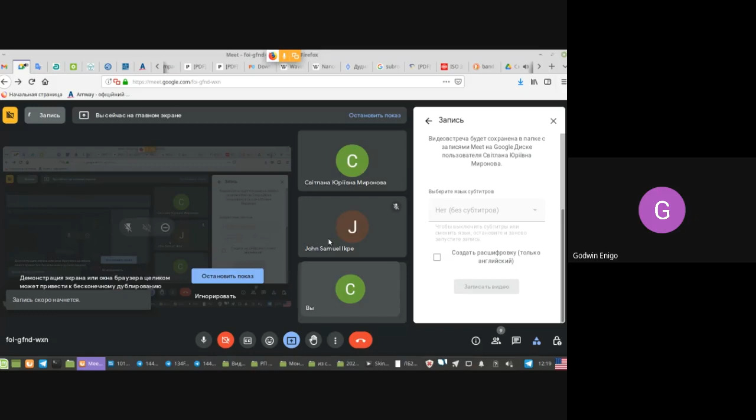This one. Yes, ma'am.

Once again, laboratory work. Laboratory work that we were doing previous time, last 2 weeks, and you are going to finish it now. Actually, there are two different laboratory works, and seemingly one report, but you have it in 4 pages.

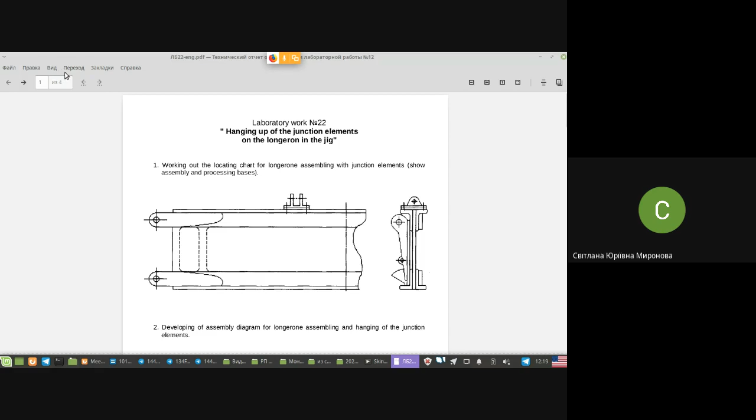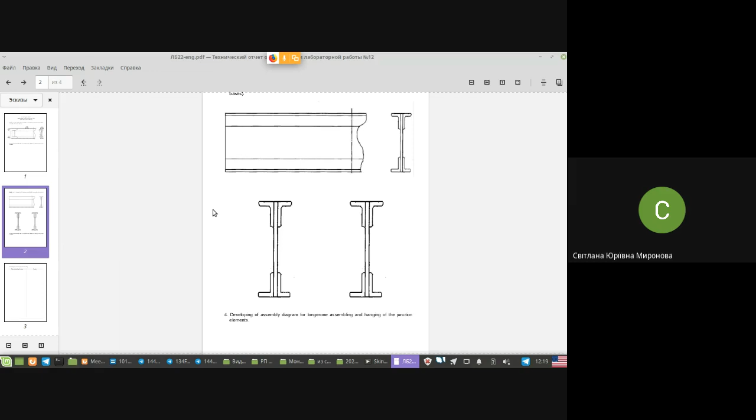You have 4 pages in this report. One page with a picture and empty place for a diagram of assembling. On the back side, also a diagram of locating chart and empty place for diagram of assembling. And you have 2 pages each with technological process.

What is the difference? Actually, the item to be assembled. Laboratory work today, finally, we suppose it to understand the jig arrangement and the process of manufacturing this final shape of this spar.

That is the spar of the center wing. What is center wing? I hope you remember. There is the compartment of wing, which is between the left wing and right wing. It may be built into the center of the fuselage, under the fuselage, or over the fuselage, whatsoever. It's the central compartment of the wing.

This central compartment of wing typically has the same structure as the wing. It has a front spar, a rear spar, and ribs between them. Whatever spar this is, front or rear, above all, you should imagine the airplane, and you must recollect that.

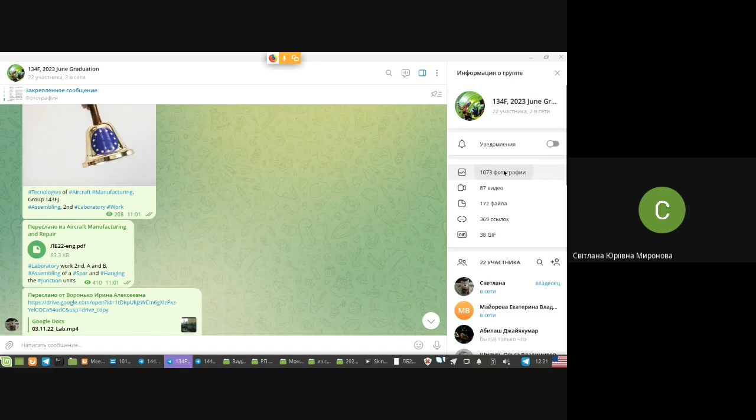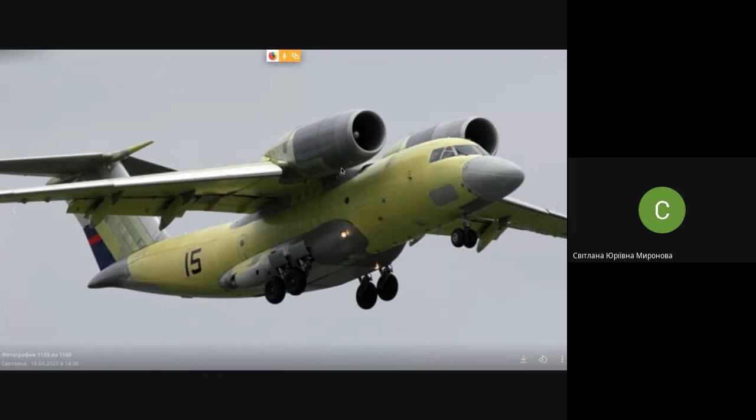It's your group. Some days ago I dropped you here a photo of Antonov 72. Look, what is this? Where is the center wing? Center wing is in the middle, between left and right wing. As you might see, practically at the center wing, the engine nacelles are joined. Maybe that's not better visible here. No, this photo is more talkative. By the way, why it looks so weird, and why I dropped it to you.

In order that you might see it unpainted. I hope you remember that before an airplane is confirmed, before the customer agrees to take it, the airplane is usually not painted into the so-called suit of the company that's going to buy it. In Russian or Ukrainian we call it livreya, like the suit of a servant, and in English it's called a livery — the coating which corresponds to the colors of the company. Here it's an unpainted airplane, you see.

Where the center wing is, I already said. And this center wing is symmetrical usually. You see the airplane, and you understand that it's mostly symmetrical.

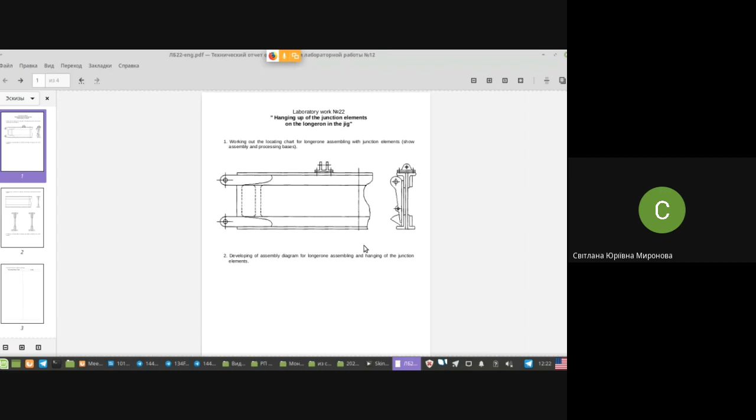So what you see here in the picture is a half of a spar, in laboratory work, in laboratory class, and in the video explanation that you were supposed to watch before class — remind you, before class, even 2 weeks ago. It's a symmetrical picture, and that is why you see only the half. On the left, on the right, it's completely the same.

So when you are explaining something in the diagram of assembling here, you're supposed to remember that you have two halves, and maybe you need to use names like left one, right one. Here you also have top and bottom. You need to remember that you are working with top, bottom, left, right.

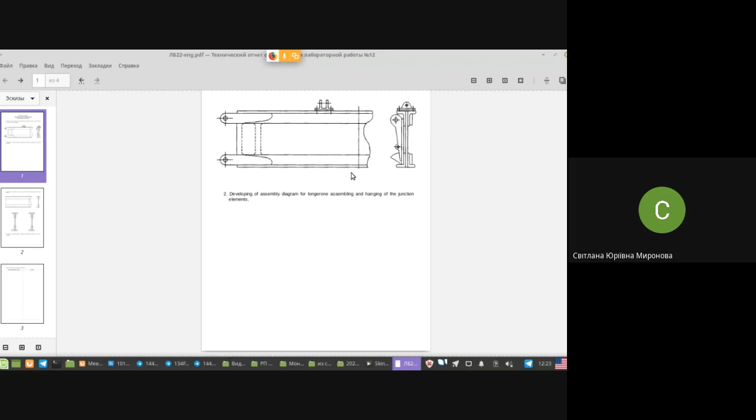Pay attention to the next fact — what you need to do. You need today to compose a technological process of hanging the element of junction units, so-called elements of junctions. What are elements of junctions in your case? There are big brackets on the back side.

Here you see, approximately you see. You will see it in a photo and you have seen it in the video. In case you watched this video, lazy bones — I'm already tired of swearing at you, Mom, I swear — you watched the video, oh, you pleased me. It's just a balm on the wounds of my heart, really. You can't even imagine. If even you do not understand what is it there, I'm happy to hear that at least someone followed the task.

Look, big bracket. You have little brackets in front immediately that we usually call knives because they are shaped that way, we call them knives. And also you have engine mount brackets — these little side brackets.

All these brackets must be located onto the spar, must be assembled all together with the spar only in a jig. That's why we were talking about this in the topic of junctions at the beginning of the semester. The axes of these brackets, the axes of holes in these brackets, determine the position of other aggregates with respect to each other, because if you place a bracket wrong, these side brackets for engines — what may happen? Engines will have different heights or different orientation of the engine axis, or they will be unjoinable at all to this wing. And it means your airplane lost flight performance.

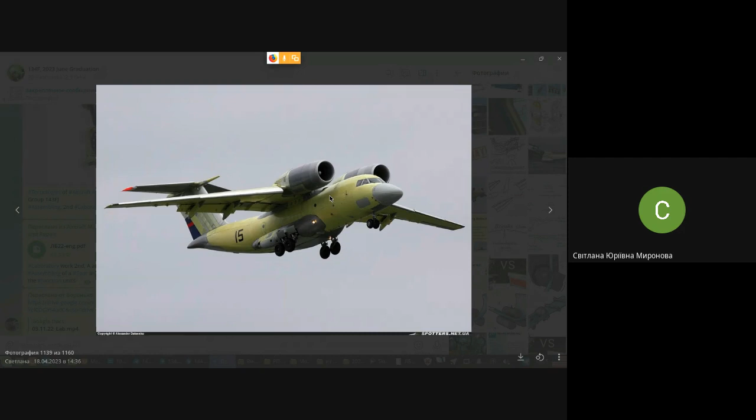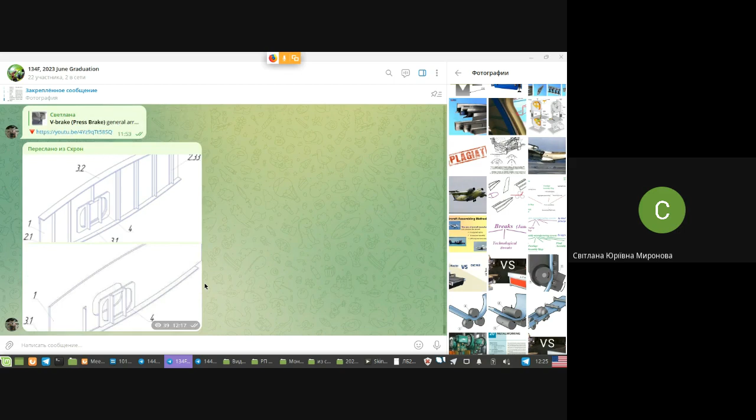In case these side brackets that you might see — I forgot, where should I show something? Well, in the laboratory class report. Ah, here it is.

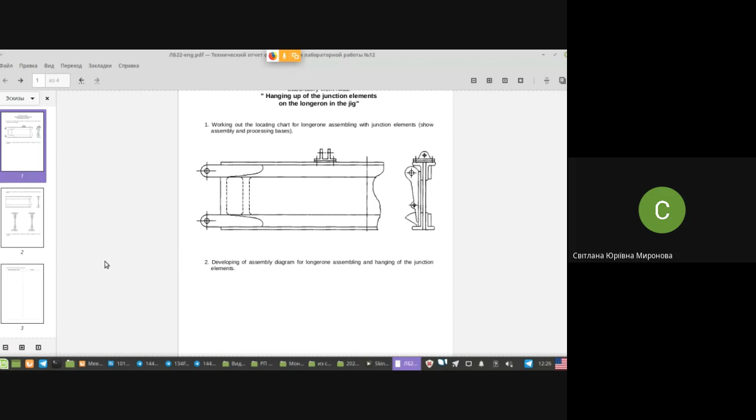This spar, which consists in turn of web, caps, and stiffeners, you may assemble preliminary and not compulsory in a jig. It was up to you, what you decide.

Whatever you decide next, you reflect here in the diagram. It's called assembly diagram - the diagram of order of assembling.

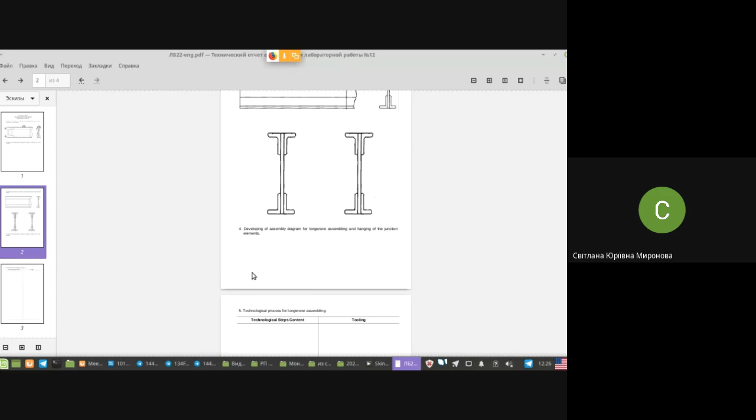Here today you suppose to compose the final diagram of assembling, which includes the previous one as a sub-diagram.

I hope you remember that the diagram has so-called parallel sequential assembling. In order to understand what you are starting with, what is the diagram, what is the first part here, and what are the names of the parts, you need to watch the video.

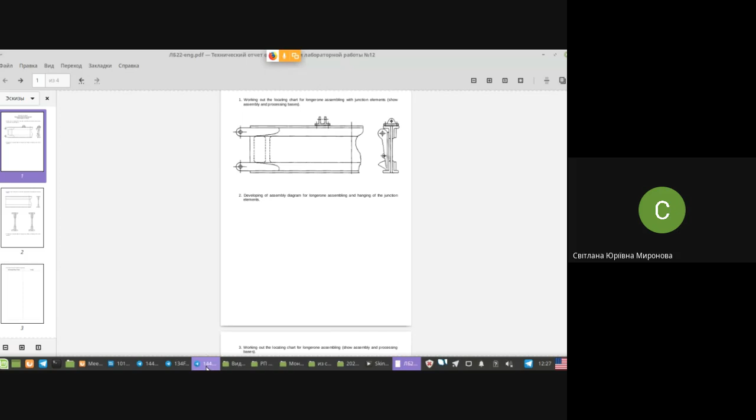I also said that I'm going to show you the materials that you have seen in a video. The materials were used with the previous group in order to help you - here are drawn the names, and these names you are recommended to use. You may use it, or if you'd like to use something else, you may use something else.

What is assembling by assembly holes? I hope you also remember - it's in the picture a little bit higher. It's aligning of preliminary made holes in some parts, and due to this, localization - finding, searching position of parts with respect to each other.

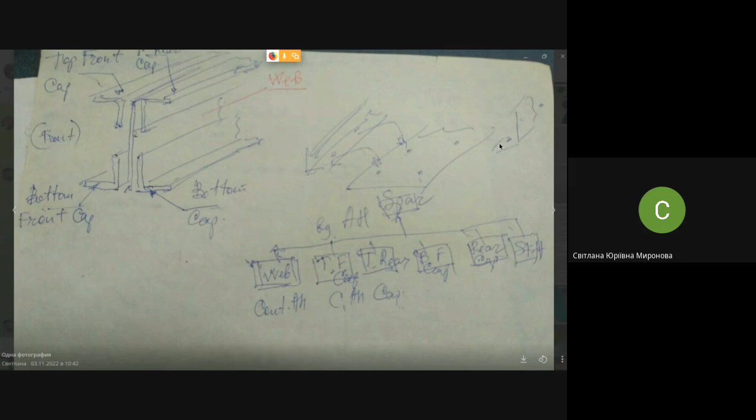In this case, a web has, as it shows, a system of assembly holes for top cap, for bottom cap, and so on. If you'd like, it's not compulsory to do it like this - if you'd like, you may assemble the same. There is the same picture, but by pieces.

If you'd like, your highnesses, you may assemble it in a jig. Here is already another stage of explanation, a bit later, not now. Let's rotate it.

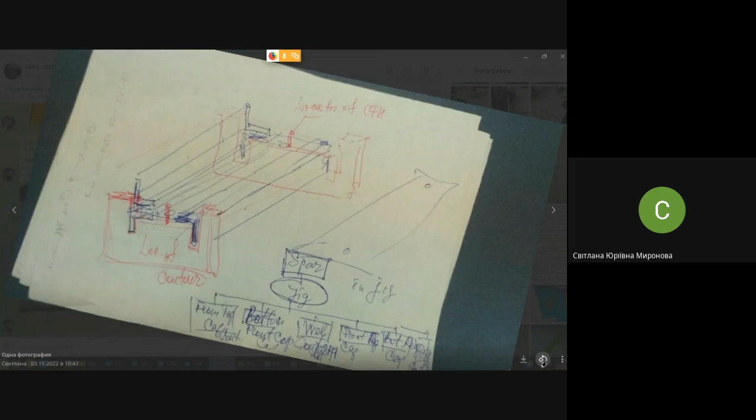If you'd like, you may do the same task, assembling the spar in a jig. Pay attention what the jig looks like - practically, it comes about such plates, the system of such plates. It's very similar to what you were doing in your very first lab, assembling the spar.

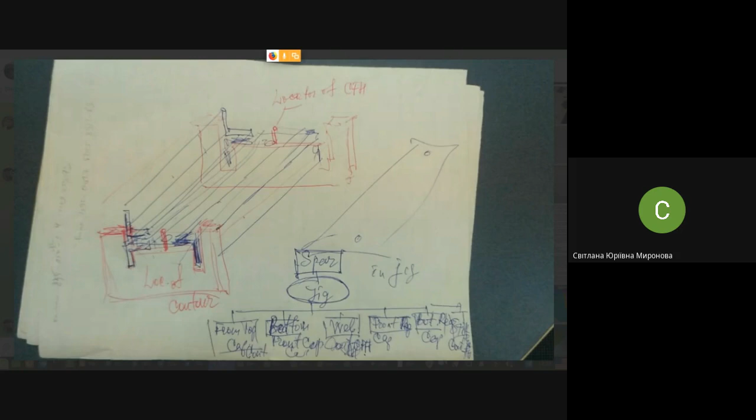But there it was a readjustable jig. If you may not insist that you have a readjustable jig, you may insist that you have a special jig for this spar assembling. It's a jig without hanging the brackets yet - it's just a jig for locating the web, the cap, and so on. The most primitive jig ever.

Two pins, no? And some locators - it comes about, let it be 1 locator per 1 meter. Around 4 locators will be enough for this part in order to provide the accuracy of the outer contour.

And it's another diagram of assembling that you may see here. What is changed? The order maybe has changed of assembling - instead of web at the first place, it has appeared system of caps.

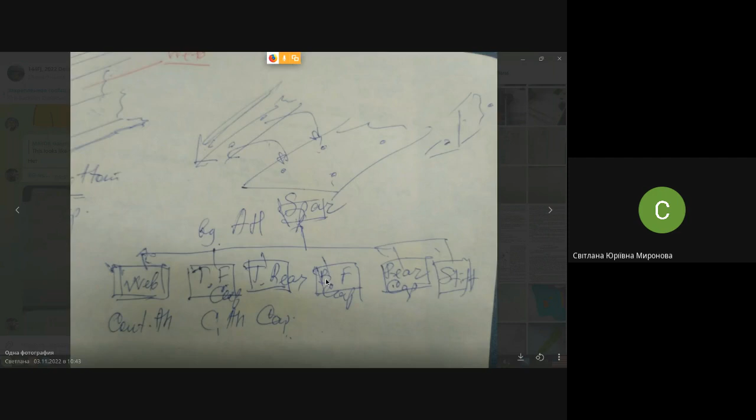Now you see that in a diagram has appeared a jig, in contrary to what we have seen before, when we had web at the first place and no jig. In this picture, you see jig has appeared, and web is somewhere in the middle, according to order of their locating in a jig.

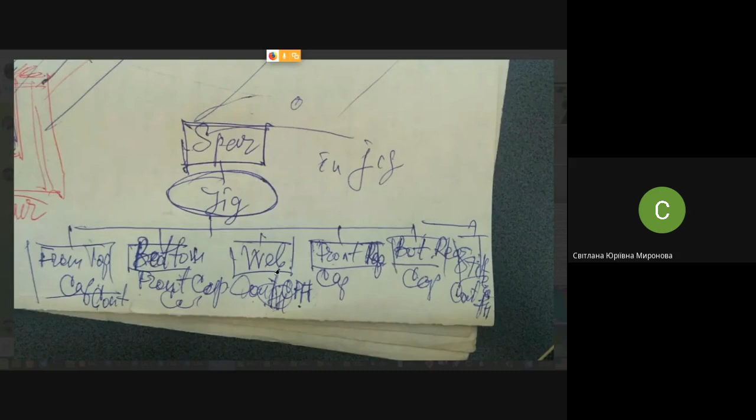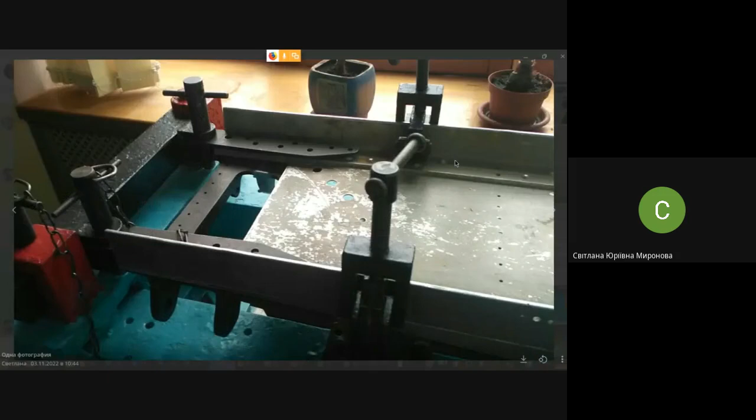Well, let's see some photos to recollect what we have. Here you see the end of spar, this end of spar. You see one knife, another knife, and pieces of brackets that is under the part.

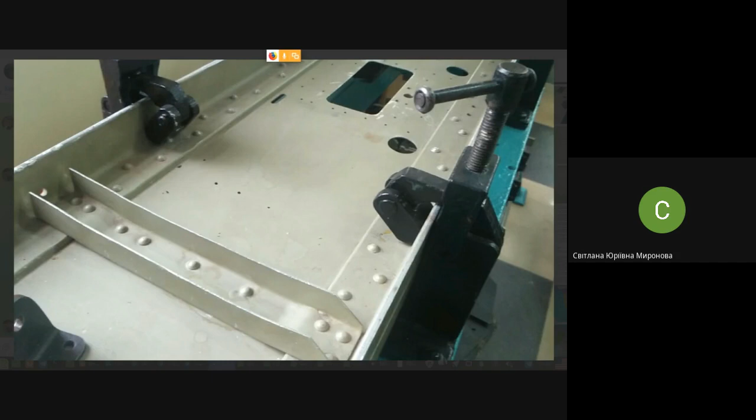Next, this by itself - we can't see it from both sides simultaneously. We see only web now, cap, top cap, bottom cap, and one of the stiffeners. On the back side, you have quite the same stiffeners. Pay attention that stiffeners are in front of each other.

That is the first ever problem that you have. Pay attention that stiffeners, by the way, from both sides, they have so-called joggle. They are made from sheet, not as we get used to - not off extruded profile, off sheet - but anyway they have these joggles. You see double changing of the backside in order to be attached both to the web and to the cap surface.

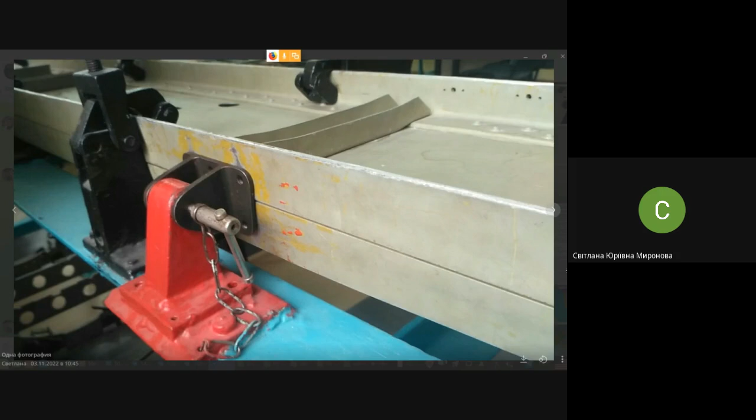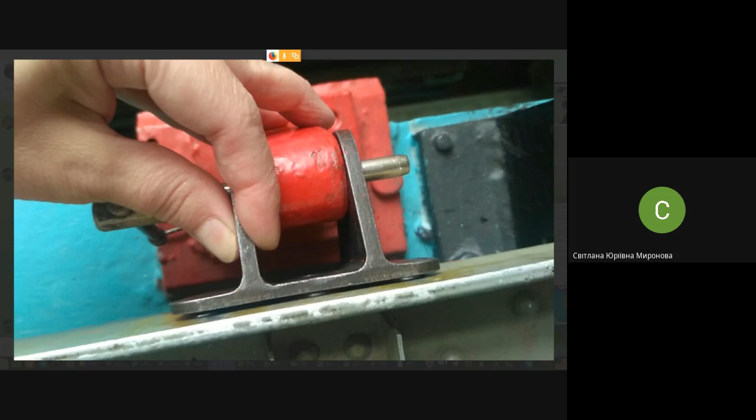Just some more photos - that is top bracket, this little side bracket for engine mounting. Not for engine mounting, it's one element of engine mounting. Don't think that the whole engine may be clamped down, pinned to the airplane with this little needle-like bracket.

Some photos explain you the structure of the jig.

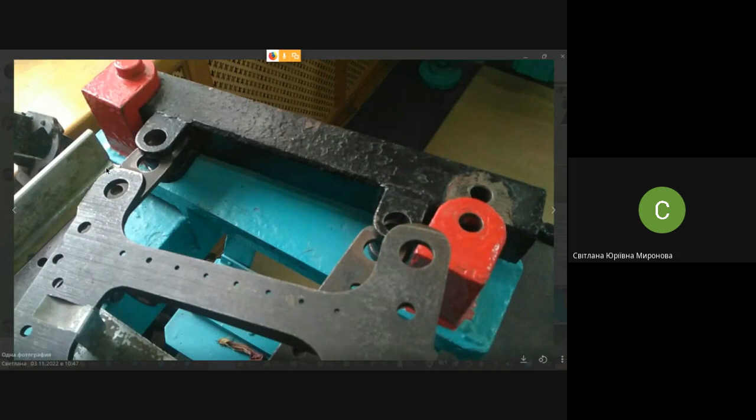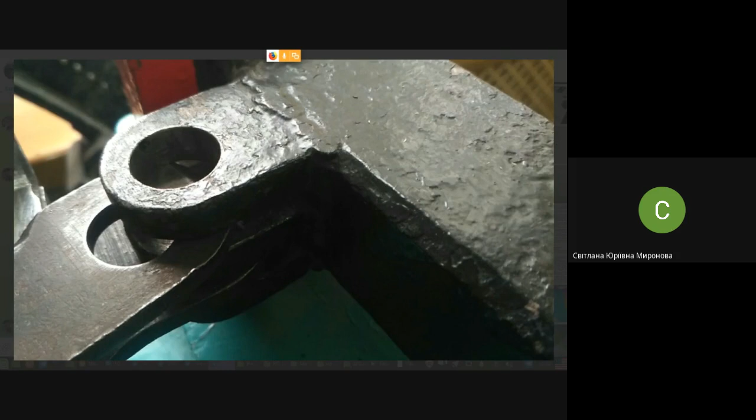Now you see this bracket immediately. Yes, and you see it locating onto the jig. Now let's try to talk about what is the process in progress. Let's see, do we have the whole picture of the jig or not?

Practically yes. What you see is the jig from one side, along the jig. And once again, I remind you, the jig is symmetrical. The back side of the jig is not visible, but it's quite the same as here. It has a symmetrical portion of locators here and there, and it has symmetry at this place, and a little bit further to the middle also has symmetry.

Pay attention to how many locators it has. So exactly as I said, 4 locators are enough. And it has one locator, second locator, third and fourth. Don't forget that in this case you bring in here an already pre-assembled spar. Another side of pickups is not for locating, it's only for clamping.

Yes, there are a couple of pickups, but the bottom portion of pickups is used for locating from both sides, and the side of pickups, this vertical portion, is used only on one side. Usually we attach, press, locate the spar to this side, to us. We are standing on this side and we pull it to ourselves.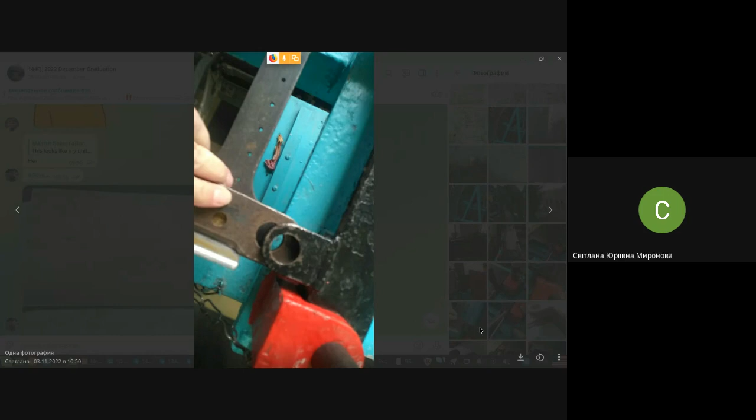Well, we're watching this picture too long. As I already said, the first problem is how to locate it, and the next problem is how to make the joint. How to locate it? What locators do we have? We have, wait, here it's better visible. We have a locator. Now you see the far side of the jig, this symmetrical far side. We have a locator for these big GBH holes.

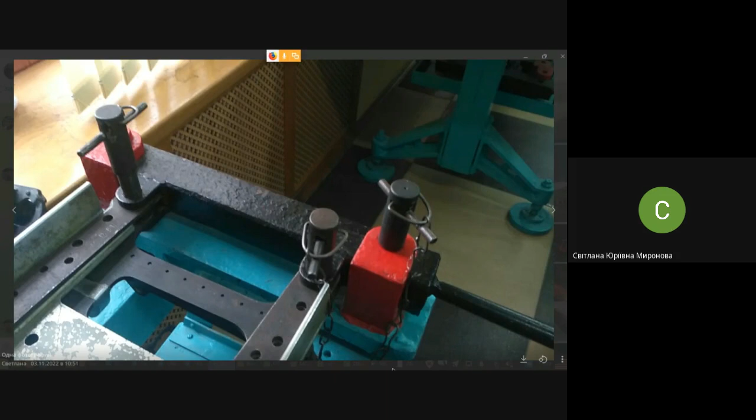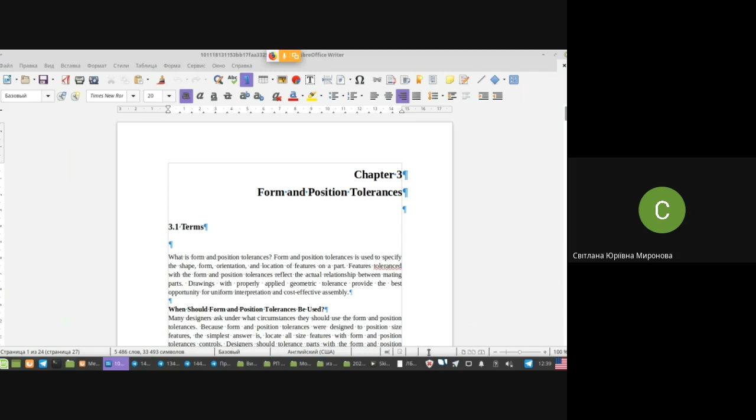Look at this. These holes, they are not in work at all in this laboratory work and this stage of assembly. When I say we have locators of big holes, what I mean? I mean these two holes. You see, hole in knives, both in knives and in bracket.

Oh, yes. And you see it's like a layered pie, yes? The bracket, next spar, and next knife. Holes are, of course, only in bracket and in knife. I hope you see it. And you see how they are located. We have some element like a bar with holes. Actually, it looks even like a handle, not just a bar.

And in order to align holes, you align and clamp parts. You place here the pin in one hole and in another hole. Why the third pin? What is it necessary for? Actually, this locator is openable. It's rotatable. Why? When you locate the part into the jig, it's not a problem when the locator is placed like this.

After assembling everything, imagine that you remove this pin and that pin. May you remove the spar through the locators? Of course not. And that is why at the end stage you need to remove pins, all pins from the spar and from the locator itself. And next you need to open the locator, rotate the handle to this side in order to remove the spar after assembling. That is why it's rotatable.

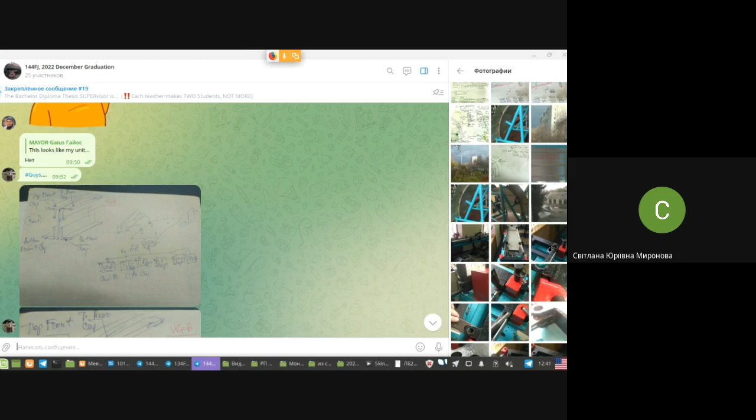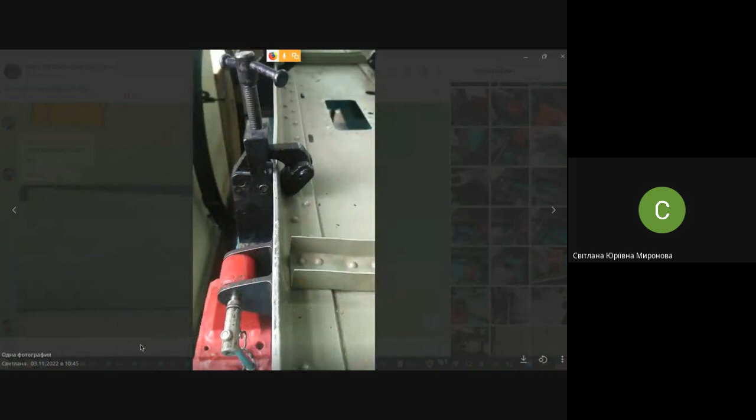It was one locator, another locator of GBH where we have the little spar. Here is this locator, you see it, yes? Aside of the spar, we have this red element. It's supposed not to be red actually. Red color is only for mounting elements. It's an element of second order tooling.

The one who repaired the class while all teachers were absent in summer, as I already said, painted elements of the jig in bright, colorful colors without thinking about the real meaning of these colors. The one who has no relation to our industry just made repairs in class. Looks bright, great, but wrong.

Jig must be painted in grayish colors, greenish colors, blue, something like this, but certainly not in yellow, not in red, because these colors belong only to tooling of second order. Yellow, red, orange, all those things, they are for movable elements of machines, and they are for tooling of second order. Even colors should talk to us.

What one more problem is here in this lab? We are not solving this problem, but at least we are talking about it. What might happen when we locate the spar? I already said we have couples of locators here. And it may happen that when we pull this spar to these locators, clamp it closely to the locators on the backside, here a clearance may appear. Like I show here, you see the gap, clearance between bracket and the spar.

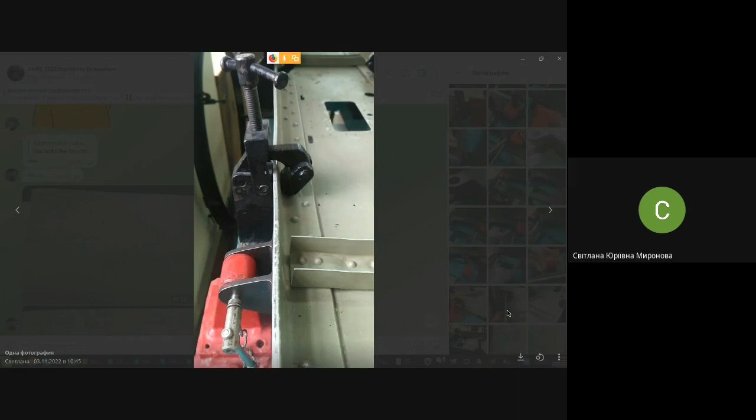What you might see here in photos, I will send you these photos. I don't think that they are much talkative to you, but I will send you. As I already said, you see brackets here, you see pickups, they're typical design. I'm sorry that you never played with it in a class, it's a very joyful process for students usually.

You see one side, another side you have already seen, symmetrical pickups, 4 times from one side, 4 times from another side. It's with the locating chart that you are going to develop, and that we have already talked about. You see the beginning of the assembly process. This handle, this side locator of GBH, now is opened, and you see that there is no bracket, no knife at the end of spar yet. First, we are going to close it. We are closing it, as you might see, until this hole is aligned with this hole in the locator.

Now you see that I'm trying to insert. I was talking, making a record and clicking photos. That is why we have this set of photos. Let it be.

You see the bracket under my hand, and I'm trying to show that we are going to align these big holes. Now you see that the bottom bracket is located, and even the knife. No, they are not located yet. Located when everything is aligned. I'm just showing what must coincide: these two holes and this hole. Finally, we are closing everything. What you see, what it looks like now: a layered pie, as I told you.

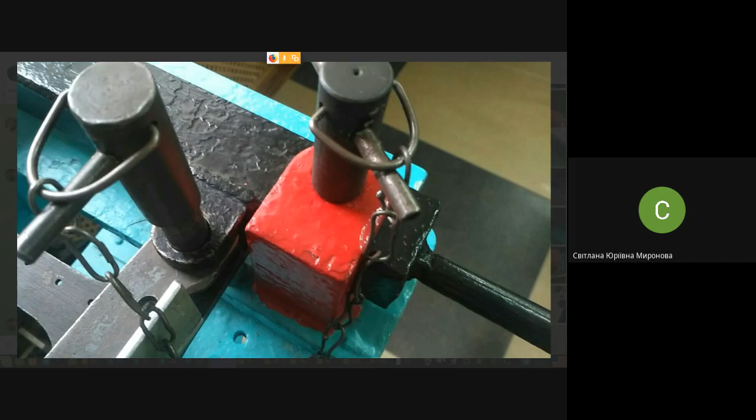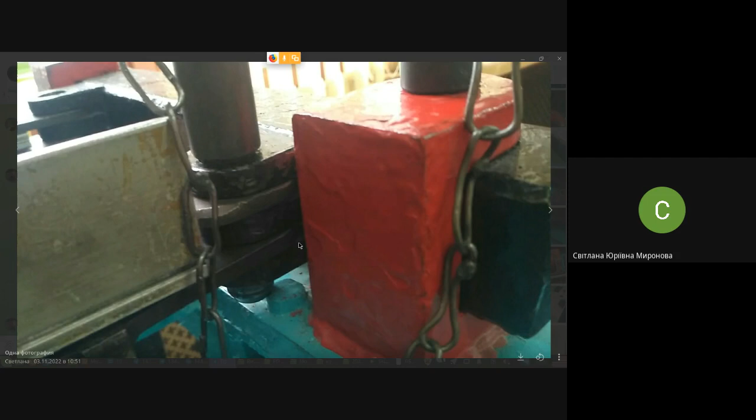Inserting the pins. Here you see the holes are aligned. I may check it with finger, but they are not clamped yet. Now everything is aligned and both clamped. But again, this layered pie is clamped with pin. Finally, we have located it. How is it reflected in your technological process? It's not the beginning of the process.

It's already the fifth or sixth operation, because the beginning usually starts with preparing the workplace, checking completeness of parts, checking absence of damages of parts, opening how many locators are supposed to be opened and which exactly, and so on. You're explaining what the workplace should look like before you start, which tooling you need to check. Next, you need to locate the pre-assembled spar into the jig by 4 locators, clamped with 8 clamps, and so on and so forth.

Next, close side locator. For instance, close side left locator. Pin it, clamp it with pin. Repeat it for the right side, because I hope you do remember that whatever you have on the left side, you need to repeat on the right side. Now you see the right side of the jig actually. Locate big bracket on the side locator of GBH. Locate left top knife to the side locator and clamp it with pin together with big bracket.

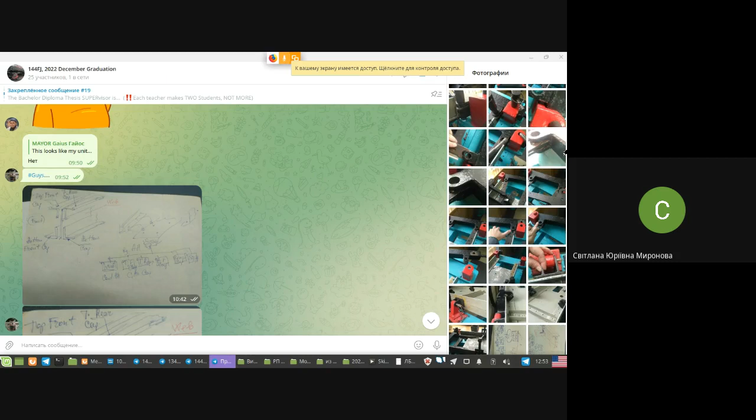Here you see the general view of the jig, and this one, left side, right side. Next, you need to go back to these pictures, no? Locate bracket, side bracket, or how you call it, little bracket, top bracket, locate top bracket. No, it's necessary to write down specification around of picture and next follow to the specification, part list, no specification, part list.

Locate top left bracket onto locator of GBH for this bracket, clamp it with pin. Next, I hope you do remember what might happen. Clearance. Measure the clearance between backside of bracket and this cap of spar. Calculate amount or select the thickness of pad, insert pad, and now clamp it.

Pay additional attention to the fact that clamping here, the design of jig, doesn't give you opportunity to clamp something here. It means that clamping here will be with not elements of jig, but with additional, they call it screw clamps or C-type clamps. They look like letter C, and they have side screw. If necessary, I may remind you, they are in explanation of our first lab.

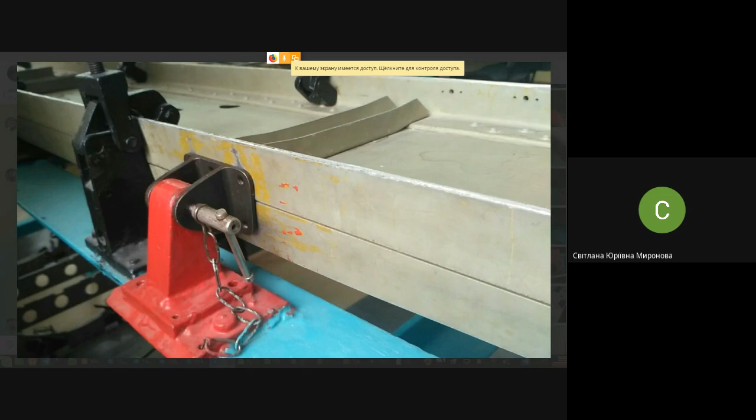The same problem you may meet at this place. At this place now you see it without brackets, but when we insert everything, might be somewhere the photo. That's why I made this photo actually. Pay attention. Knives are aligned normally, they are parallel to the spar, and here maybe not ideally visible, but here you see clearance between spar and this bracket. It's significant clearance because bracket is very heavy.

Now it's like hanging only on this place, on this support, but under its own weight it deviates from spar to the bottom, and it means that you need also additionally clamp it. Where may you clamp it to? What do you imagine when we have everything here already, only to this place or to the web? To the web, it's not reliable. Web is very thin. You may place here additional clamps to this place, like C clamps, when you have both knives and brackets here, and on this side either.

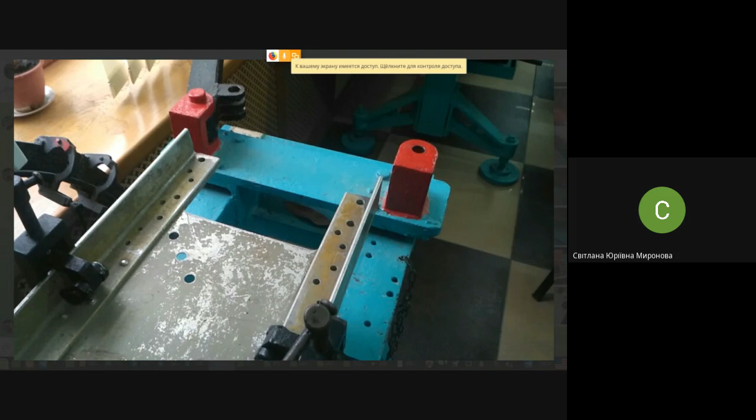But problem is, as you pay attention, the amount and location of holes is different at the top and at the bottom. Diameters of holes and so on, they are different. Pay attention that as soon as you place here C clamp, some holes become unreachable for you. You can't have access to these holes. And actually in life it's compulsory, such a thing. First, you are attaching temporary clamps, C clamps.

Next, you are not drilling all the holes, you are drilling a couple of holes, the farthest holes usually, if we're talking about short place. For instance, you will drill these holes, and into these holes you will insert temporary screws or temporary pins, or maybe even clecos, if the diameter of hole corresponds to nomenclature of clecos that you have in the shop. Pins in holes of structure hold all the elements of structure together, and next you may remove C clamps which overlap access to the other holes, and you may continue to drill other holes.

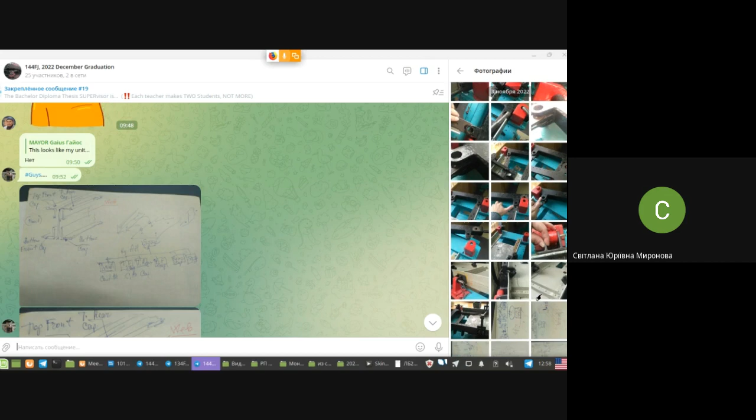That is such a moment in this laboratory work. In explanation everything is given, do forgive me. What you also should pay attention to. Practically we have already discussed everything that is possible, guys.

Once again, first you are preparing the jig. Next you are making sure that you have all the tooling, that you have all the parts undamaged and they correspond to the specification, to the part list. Next you are checking that all clamps are opened. All clamps, it means that you have opened 8 clamps of these pickups. You have opened 2 side locators and you have removed pins from little bracket locators.

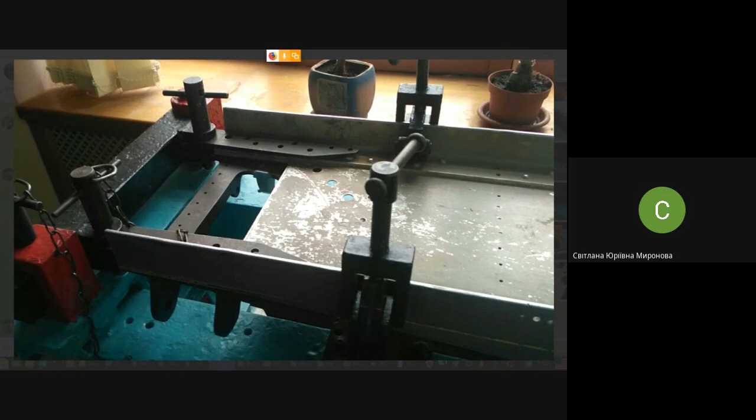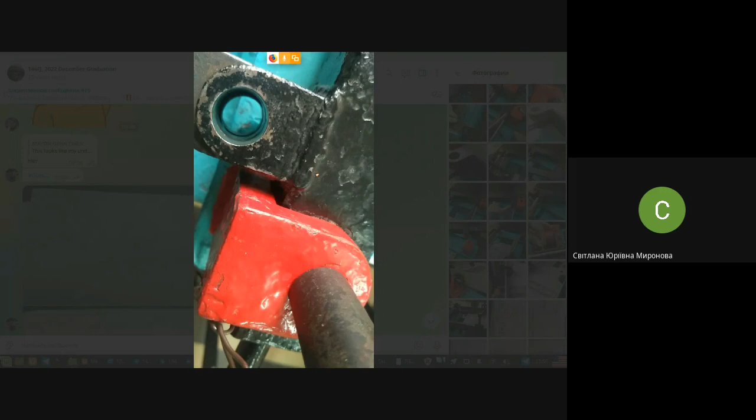Sorry. After you located and clamped the spar, you come to locating the brackets. Not this one. This one. Close side GBH locator, locate big bracket, locate knives, clamp it with pins, repeat for another side, for symmetrical side, and please don't forget to locate little brackets to their places, to measure the distance between bracket and spar, and to insert the pad.

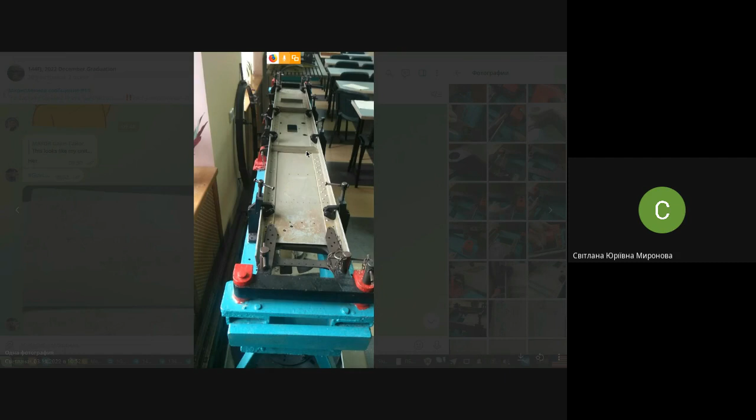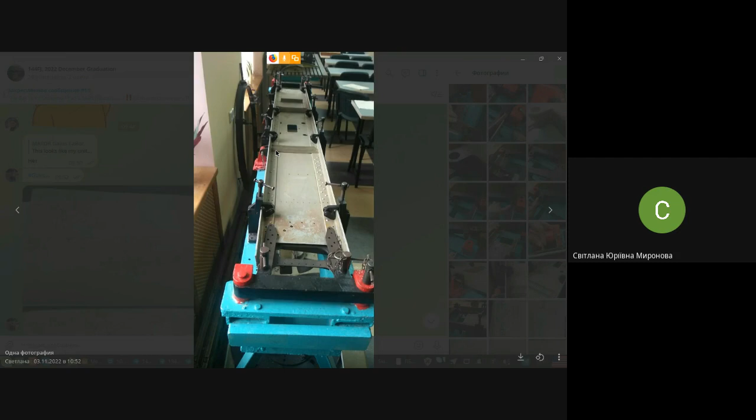Actually, what I was talking right now, it was order of assembling. Pre-assembled spar, next big bracket, knives, next little brackets and pad. In general, it's the order of assembling, but in order of assembling, you have different names. Where to take these names? Not that one.

No, in such a picture, for instance. You have it in the explanation. These photos I will drop you; I will copy them from another group and drop these photos into your Telegram chat.

And the next procedure is explained in videos, that is why I'm not going to explain it once again. It's the procedure of making joints. You need to fulfill some bolted joints, some riveted joints. Riveted joints, if you'd like, you may fulfill immediately at the place, or go out with this spar together with brackets already pre-assembled to the riveting press. But bolted joints you need to do immediately in a jig, compulsory.

And each time making the joint, what do you do first? You need to prepare the hole. In most cases, it comes to first drilling, next countersinking, next reaming. Next, you need to clean parts. It means that you need to dismantle some parts in order to have access to inner surfaces, to clean them from burrs, chips, flashes, whatever. After cleaning the parts, you need to locate everything back into the jig.

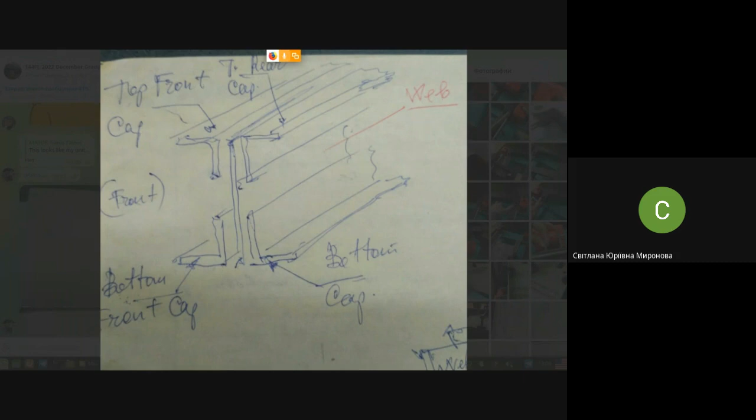In this case, you will see that the red line is broken. You will see it visually during inspection between flights. And in this case, it's necessary to stop flights and start repairing procedures. That is why they are painted in such a weird way. Let it be. Well, right now, questions?

No questions. Guys, are you here? Yes, ma'am.

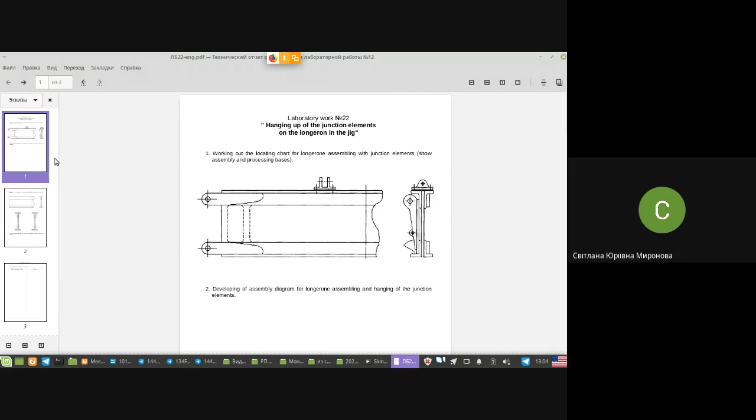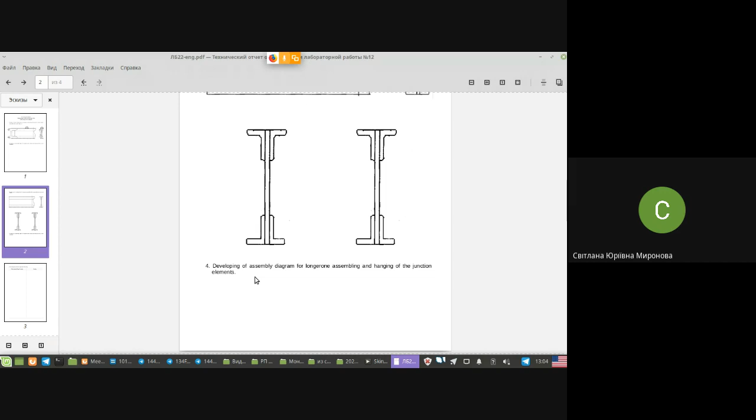Sure. I hope you understood that previous time you filled this page and this page. It means assembling the spar either by assembly holes or in a jig, this spar without brackets. Once again you have the locating chart to draw here. You have here the assembly diagram, order of assembly, and technological process. And here you see you have an outer layer, like a shell. First page and last page.

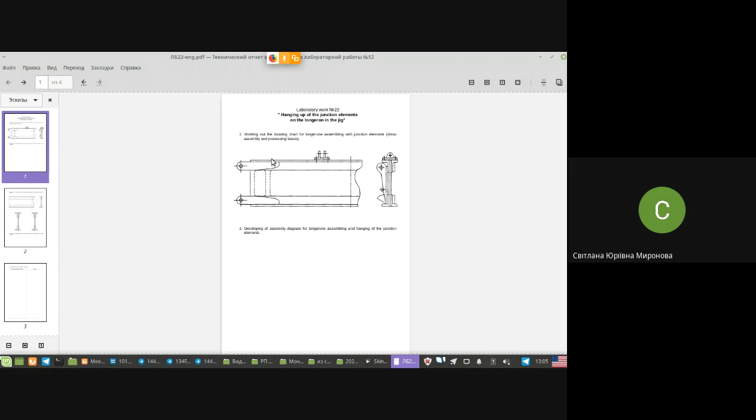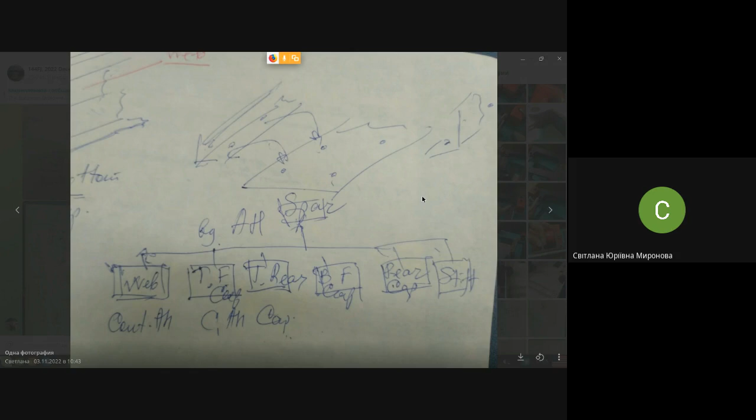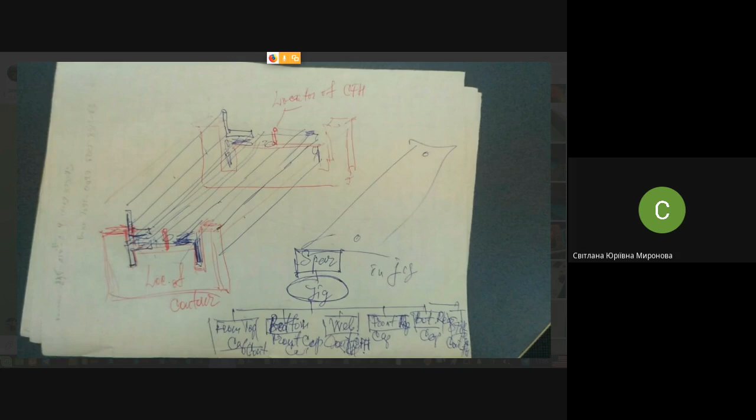On the first page you have the locating chart. I recommend you write down all the names here, and you were supposed to do it actually 2 weeks ago. Assembly diagram, it's an empty place, in order that you might draw something like this nightmare, without pictures, of course. And it's not the assembly diagram for the spar with brackets. It's the assembly diagram only for the spar. It comes to the assembly diagram either in jig or by assembly holes in the previous lab. And today, of course, you are working only in a jig.

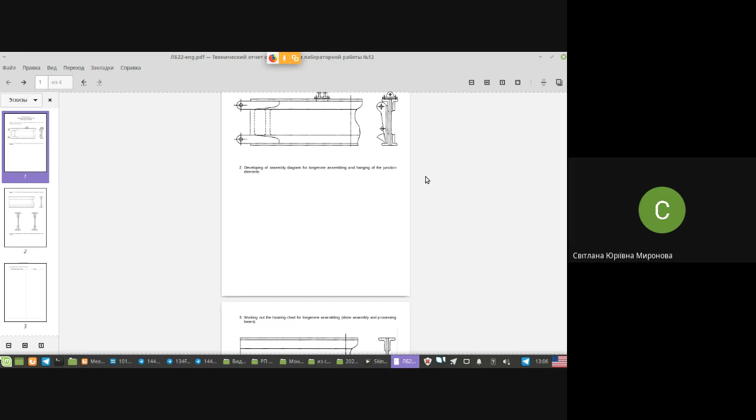I remind you that at the top you have Center Wing Spar. Next you have an oval with the name jig. And next, in the order of assembling, you have all incoming elements. And you must follow the standard. Don't invent, please, your own appearance of the assembly diagram. You must follow the standard. It looks like a block diagram, without tricks, please. And next you need to compose the technological process here. Mostly it comes to joining, because the most complex elements of this process are joining, and about locating we have talked in detail.

If there are no other questions, we are stopping the record. Any questions right now about the lab?

There are only a few present, let's see. Questions? Azhelik, Brinta, Godwin. Pradiv has said that he has no questions. I don't have any questions, ma'am. Azhelik, Godwin, questions about the lab? Don't make me cry. Godwin, are you here? Or maybe Godwin is sleeping. Okay. Yeah, let's stop the record.